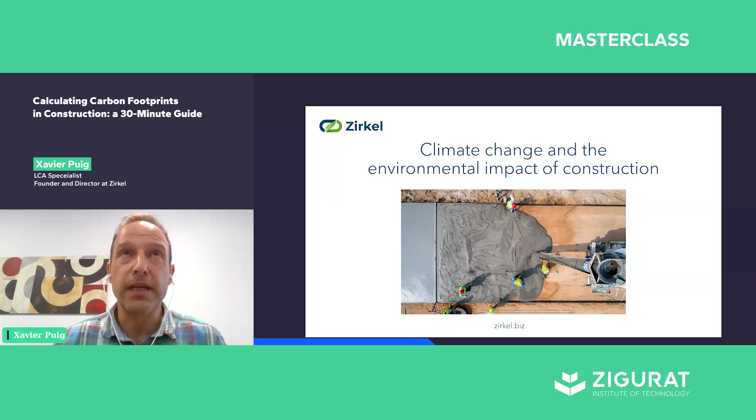So now we are going to talk about the topic of carbon footprinting in the construction sector. We will talk about buildings, and we will talk also about construction products, construction materials. So first of all, just to give a picture of the relevance of the carbon footprint of the construction sector.

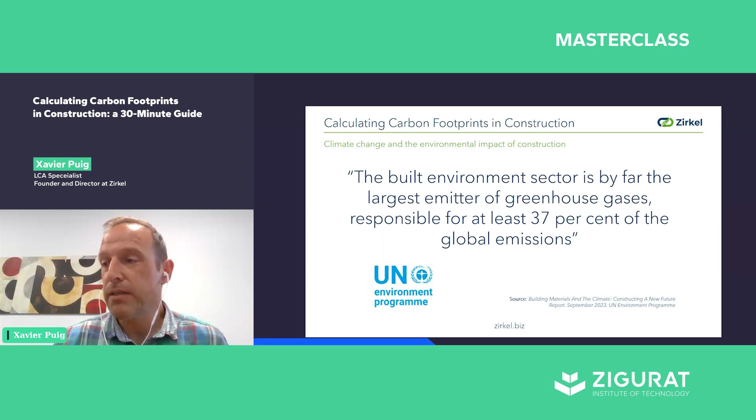According to the United Nations, the built environment is responsible for more or less 40% of global emissions worldwide. Okay, so it's a big number. And we also have to take into consideration that, according to some projections, the global building floor area is expected to double in 2060 in relation to 2020.

So, in a scenario of global warming, taking into consideration the contribution of the built environment to that global warming, and the projected growth of the building sector worldwide in the next decades, it makes total sense for all professionals in the industry to understand what the carbon footprint is,

to understand how to assess and calculate it, and also how to implement measures to reduce this carbon footprint and to build more environmentally friendly buildings. Okay, so this is the general scenario.

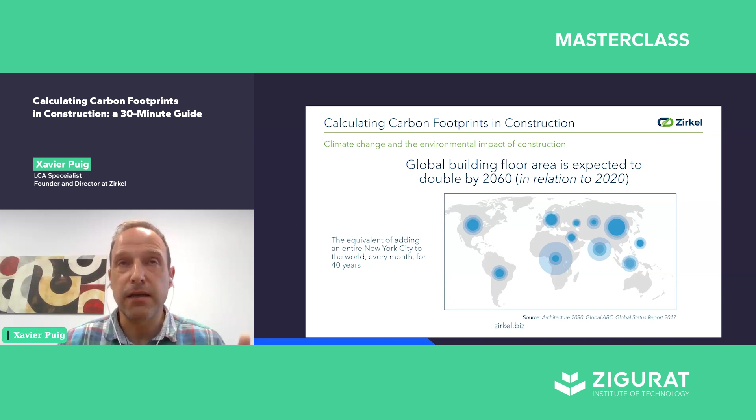And now, if we focus on the carbon footprint of the built environment, of the building, we have to understand that there are two stages in the life cycle of a building and also of a construction product that contribute to global warming, to the emissions of CO2. One concept is the embodied carbon. The embodied carbon is all the emissions related to the manufacturing of the materials of a building. This is the carbon that is embodied in a construction, in a building.

Then this building, during its service life, is consuming energy, and the production of this energy is also emitting CO2. So we have, on one side, the embodied carbon in the materials of the building, and on the other hand, the emissions produced every day during the service life of the building, related to the energy that the building is using. So the grouping of that is the life cycle carbon emissions of a building.

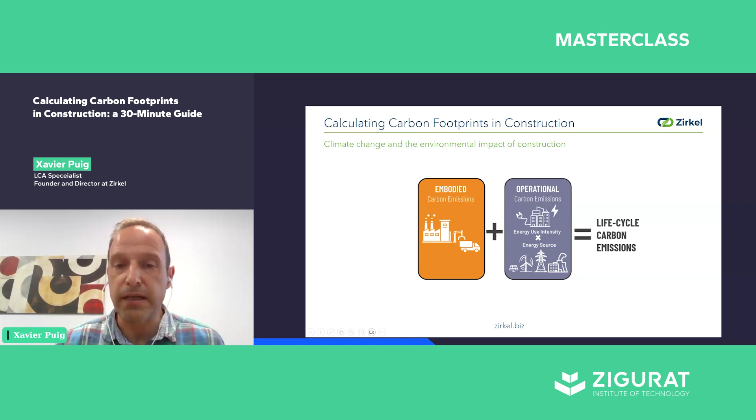So to understand that a little bit more, what we know is that nowadays roughly 75% of the emissions of the life cycle of a building come from the operations of that building, from all the emissions related to the manufacturing of the energy consumed by this building, and roughly 25% of emissions correspond to the embodied carbon in the materials of the building.

So efforts over the last decades have been put on reducing the operational emissions using strategies of efficiency and so on. So the expectation is that in the coming years, the proportion of operational emissions will decrease, because there is more and more electrification of energy, and more and more use of renewable sources of energy to provide energy to the buildings.

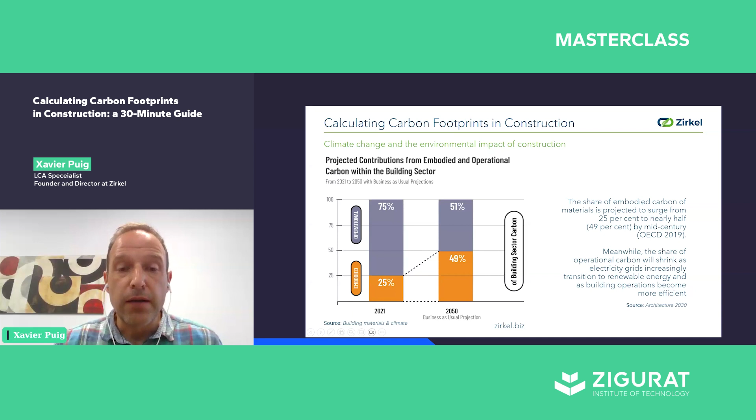Okay, and to sum up, in 2021, 75% of emissions correspond to the operational, and 25% correspond to the embodied carbon. But in 2050, because of the improvement in efficiency and the spread of the renewable energies, the proportion of the embodied carbon will increase.

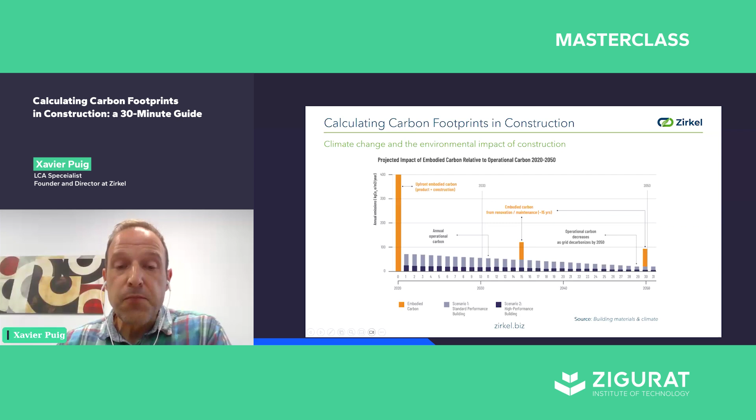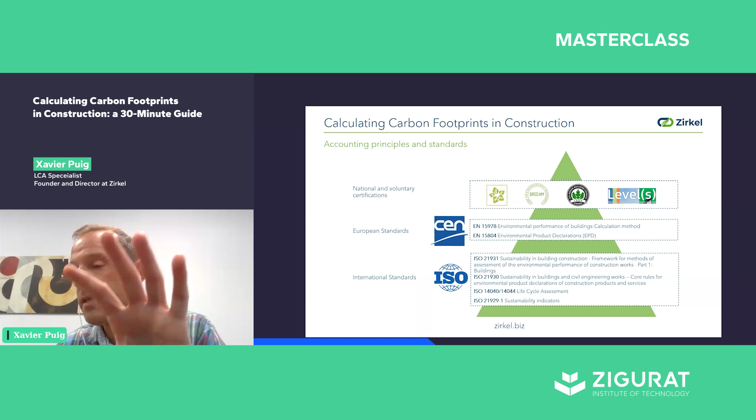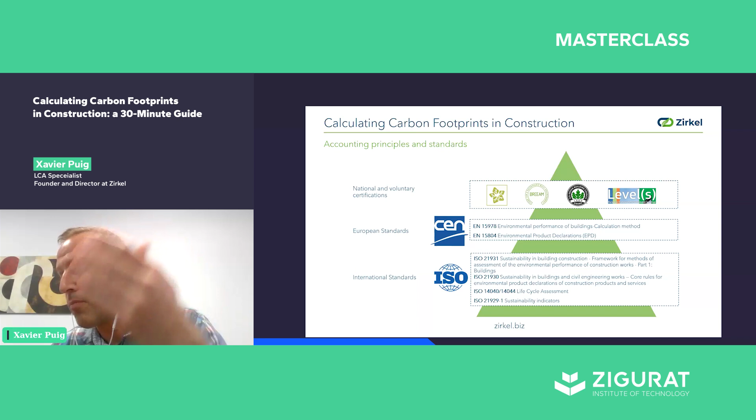So upon these standards, in Europe, CEN has developed standards for the European region based on those international standards. There are two standards that are key. One is 15978 for the environmental performance of buildings, and 15804 for the environmental performance of construction products and for the development of EPDs. And then on the top of this pyramid, we have the national and voluntary certifications like LEED, BREEAM, Verde, Level(s) in Europe, that have specific methodologies, but all of them are in accordance with the European standards and the international standards.

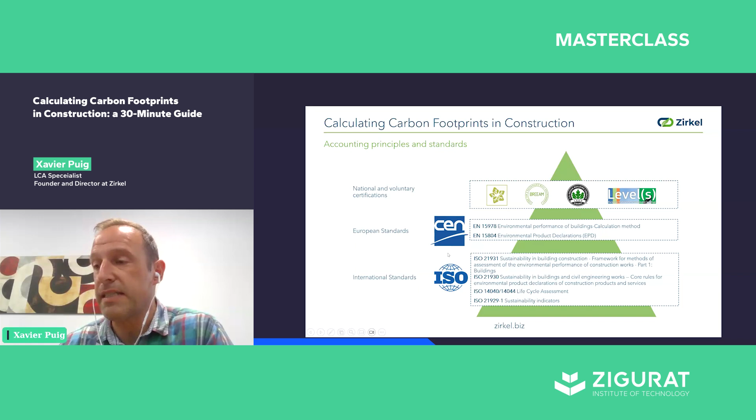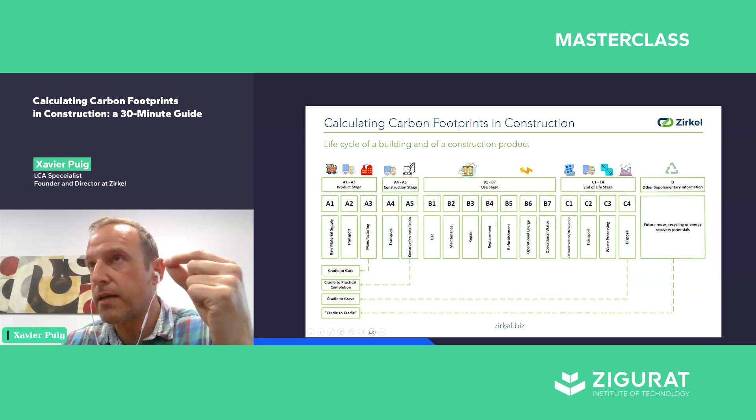So now let's understand what is the life cycle of a building and what is the life cycle of a construction product. So in this slide, we can see the different modules or stages of the life cycle, right? And this is valid for both the building and the construction product. We have the product stage, okay, this accounts the emissions related to all the processes related to the extraction of raw materials. Then the transportation of these raw materials to the manufacturer site and the manufacturing of the raw material. Okay, this is the product stage.

Then the next module is the construction stage, and this accounts for the transportation of the construction product from the manufacturer to the construction site. This is A4, and then A5 accounts for all the emissions related to all the processes involved in the construction and installation of the building. All the consumption of fuel by the machinery and so on. Then comes the B stage that goes from B1 to B7. This is to account the emissions during the service life of the building or the material.

Okay. In this service life, the module B6 is very important, that is the operational energy that we said before, right? The operational energy is the consumption of energy made by the building or by the product during its service life. From the building perspective, B6 is all the energy that the building consumes during its service life, let's say 50 years, okay? From the product perspective, B6 is the energy that the product consumes during its service life.

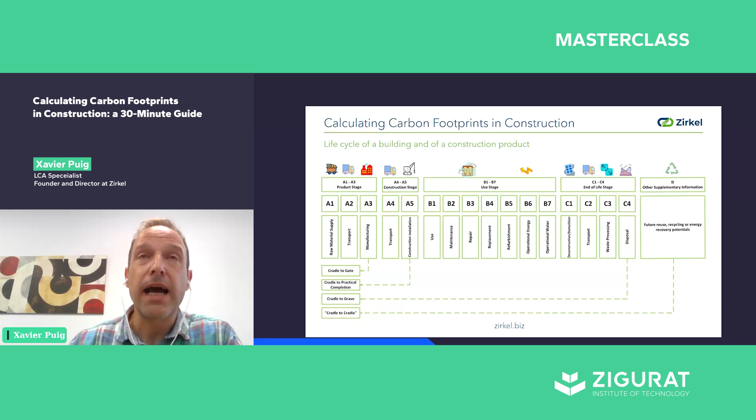So when you recycle some materials, you are avoiding the manufacturing of a virgin or primary material, and this avoidance can be accounted as a benefit for the environment. And this is accounted here in the module D.

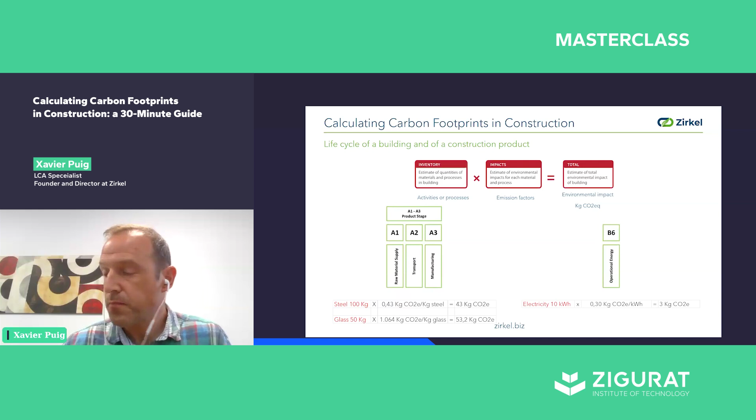Okay, once said that, now we will make a focus on EPDs, because they are becoming more and more important, and they are really, let's say, the passports with the environmental profile, environmental information of any construction product. So we will have now a focus on the EPDs.

What is an EPD? Well, an EPD is a type 3 label, an environmental label that is descriptive. It provides the environmental profile of a product. It doesn't evaluate the performance. The EPD doesn't say if the product is good or not good environmentally, or is better than another one. It simply is a picture of the environmental profile of the product. This is verified by a third-party verifier. This provides the environmental profile for one functional unit or declared unit of a product. One declared unit can be 1 square meter of the product, one cubic meter, or 1 ton of the product.

This is made like this to contribute to the comparability of different EPDs. So if we have 2 EPDs of different manufacturers of concrete, both EPDs will have the environmental profile of the product related, in both cases, to 1 ton of product. So the user of the EPD can understand very well the difference in performance between the 2 products, because this environmental information is related to the same declared unit, in that case 1 ton of product. And the validity of EPDs is 5 years. Okay.

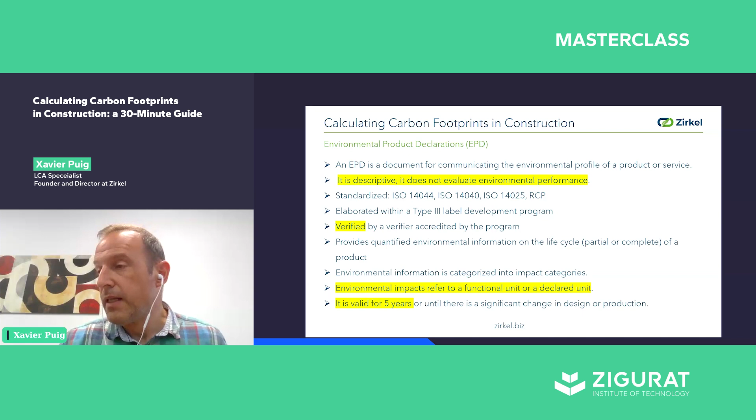In that ecosystem of the EPDs, we have 2 concepts that are important. One concept is the EPD program operator. The program operator is the entity that publishes the EPD and maintains the EPD. All the EPDs are public, and all of them are included in a database that is always open to everybody, and this database is maintained by the program operator.

And one important role of the program operators is that they develop PCRs. PCR is a product category rule that is, let's say, like a cookbook or book of recipes of how the life cycle assessment of that category of products has to be conducted. This is important because all products of the same category are assessed in the same way, following the same category rule. So this contributes to the comparison of the results of different EPDs of different products of the same category.

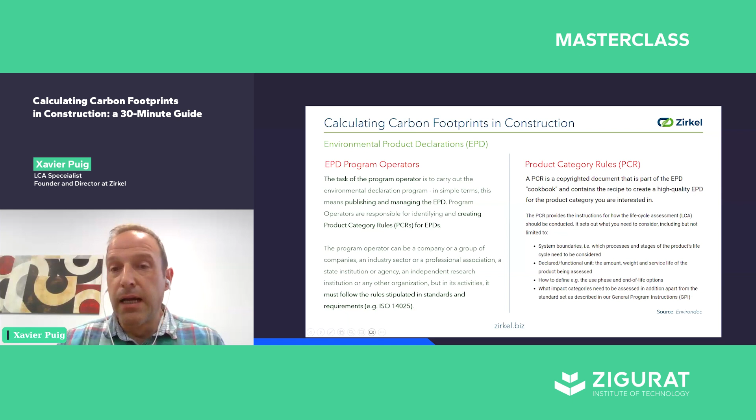Here in Europe, there is one entity that is Eco Platform. This is an umbrella organization that harmonizes how the different program operators develop PCRs and publish and maintain EPDs. So the role of Eco Platform is to gather together all the different program operators in Europe, program operators of EPDs of construction products, and to harmonize the way they develop PCRs and the way they publish information, just to contribute to a better comparability of the information of different EPDs developed by different program operators.

So at the end, that topic of the comparability and the harmonization of the information in EPDs is very important to facilitate and to contribute for the users of the EPDs to be able to understand the different environmental profiles of different products. Okay.

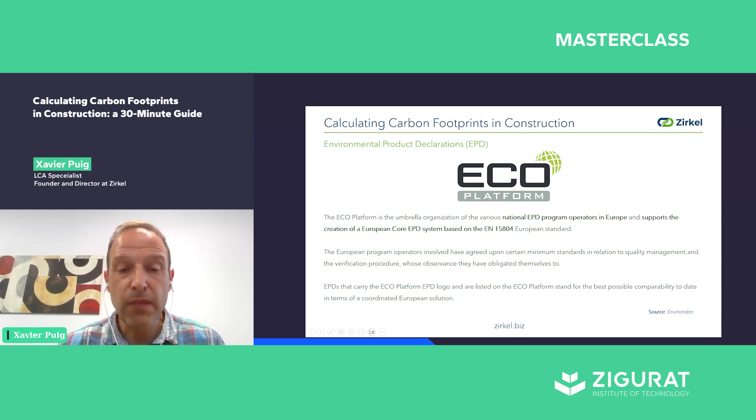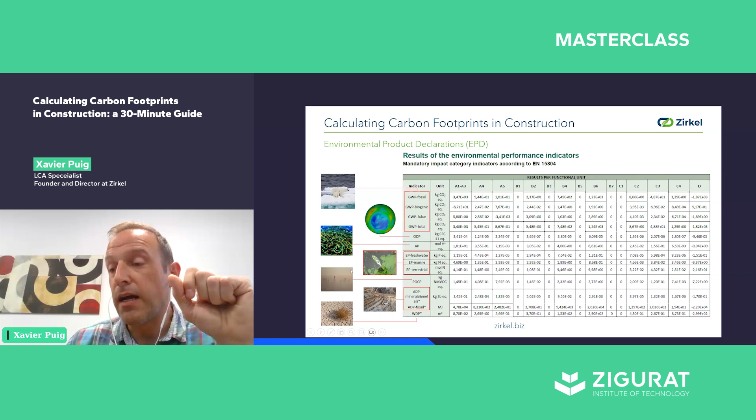And on the vertical, we have 13 environmental categories. We have global warming. This is, let's say, the queen of the environmental categories that we look at when we assess the performance of a construction product. But not the only one. We have also ozone depletion, acidification, eutrophication of the water, terrestrial eutrophication, formation of smog, depletion of resources, and water depletion. These 13 categories are mandatory for all the EPDs of construction products. And of course, the most relevant, as I said, is global warming potential.

And here we have the values for each category on the different stages. This chart gives a lot of information because when you read it, you understand in which stage of the life cycle you have the biggest impact. Okay.

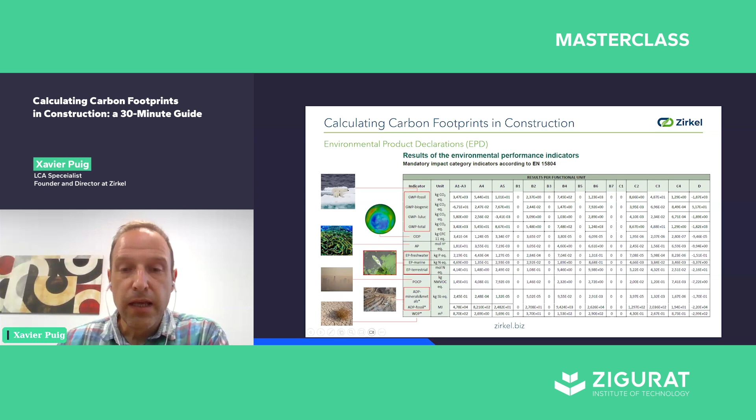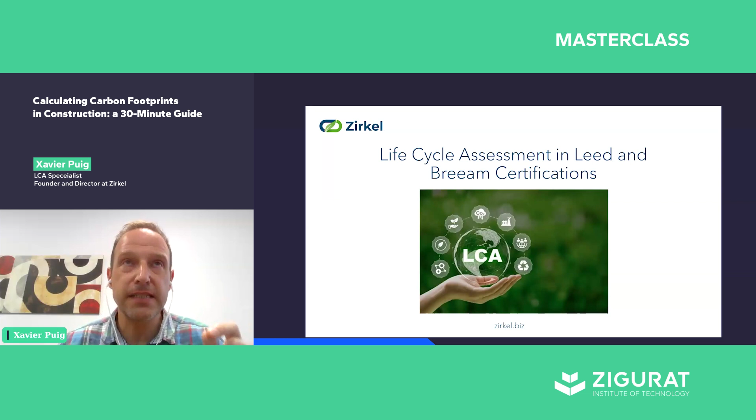So just a quick picture on how the life cycle assessment is considered in BREEAM and LEED certifications. The life cycle assessment of a building is taken into account in LEED and BREEAM certifications. Both certifications give points and credits if the project includes the life cycle of the building. LEED gives 3 points and BREEAM gives up to 9 credits.

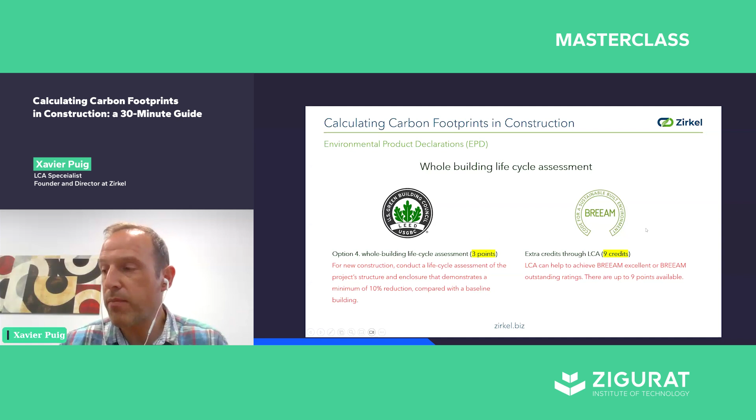Also, LEED and BREEAM give points if in the project there are products with EPDs. In that case, if there are 20 different products with EPDs, for both LEED and BREEAM, they give more points to the project if it includes products with EPDs.

So now, just to go to the end of the presentation, we will see 2 real cases of life cycle of a building and also of EPDs. So starting with the life cycle of a building, here at Zirkel we conducted an LCA comparison between 3 types of buildings. It was one building of 152 square meters, service life of 50 years. And we modeled the carbon footprint of the building built in a steel frame, in wood frame, and in precast concrete.

And we wanted to see what was the carbon footprint of the same building built with different construction systems. So the result of that study gave us that the construction with wood had the lowest carbon footprint, 422 kilograms of CO2 per square meter, against 773 for the steel frame and 1070 for the precast concrete. Okay.

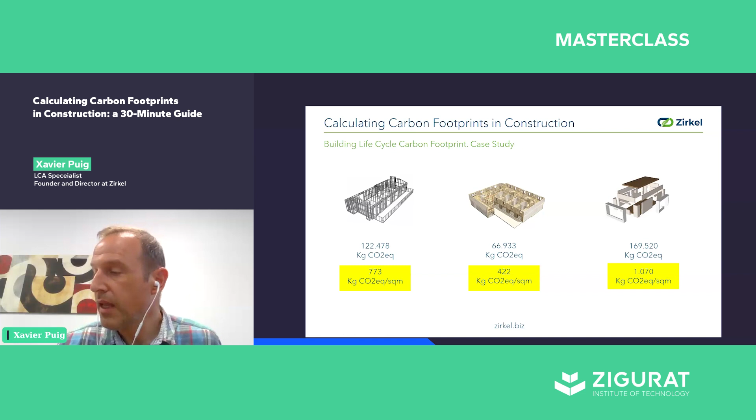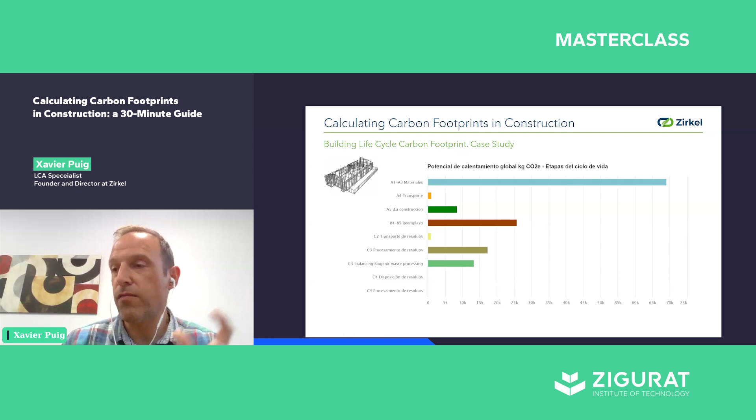Okay, and now we are going to see in detail some EPDs. And I want to provide some key concepts related to the EPDs. One is the product category rule. Okay, we have already talked about that. Well, the product category rule is the methodology that says how the life cycle assessment has to be conducted. And the standard 15804 is the base of the life cycle assessment for construction products.

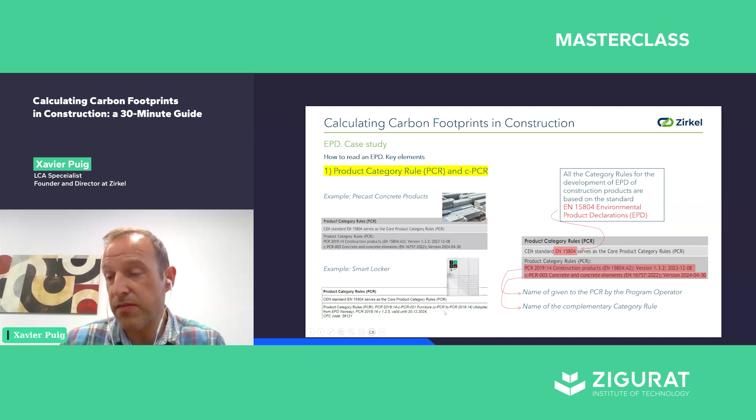We have also complementary product category rules, c-PCR, that are specific category rules that complement the generic one for building materials. Here on the left side, this is an extraction of one EPD of a precast concrete product. The core standard is EN 15804, and then we have complementary category rules for concrete and concrete elements. This is an extraction of one EPD of a smart locker. Also, the core standard is the 15804, and it has specific complementary category rules for furniture.

And then another key concept that we have already mentioned is the functional or declared unit. And this is the measure to which the environmental profile of the product is related. So the environmental profile is related, in the case of the precast concrete, to 1 ton of product. In the case of wooden panels, to 1 cubic meter of product. Okay, and that's the declared unit, the quantity of a construction product for use as a reference in an EPD for an environmental declaration based on one or more information modules.

And then, in the case of glass wool, this is extracted from an EPD of that glass wool. The functional unit is providing a thermal insulation of 1 square meter of product with a thermal resistance during 60 years. So, in the case of the glass wool, the environmental performance is related to that functional unit. Okay.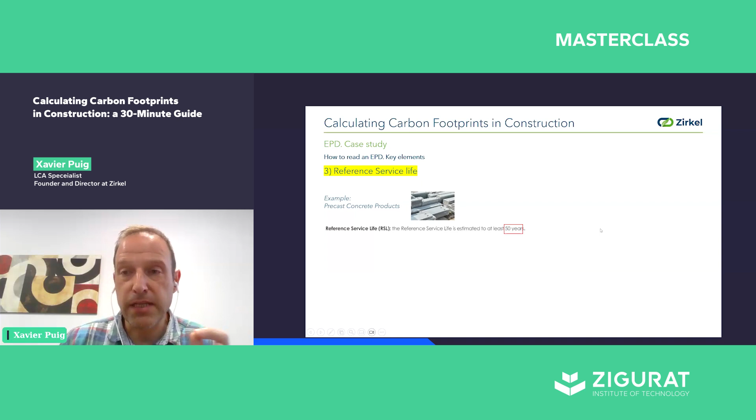A third concept important to understand in an EPD is the reference service life. Normally, the reference service life of construction products is 50 years, but not always. You can see for the concrete, for the wood panels, for the glass wool it is 60 years. And this concept is important. And here we have an example. Just imagine that we have product A and product B, made with the same technology. They accomplish the same function, they have the same declared unit, and they have the same global warming potential. It is 100 kilograms of CO2 for the whole life cycle for product A or for product B.

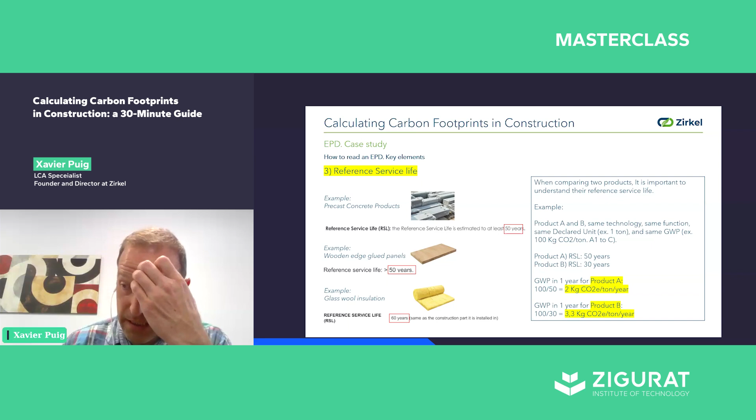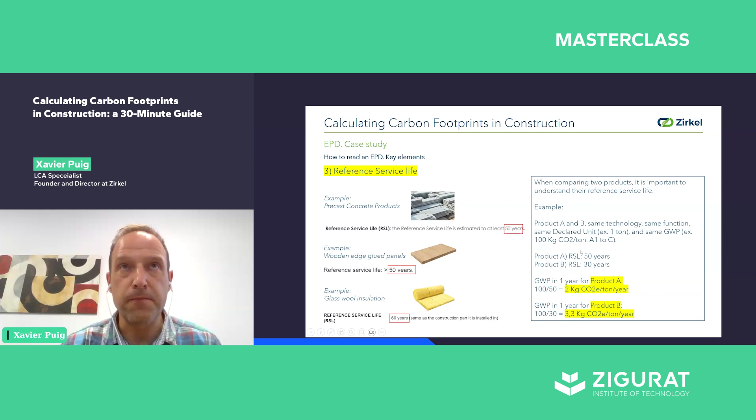And apparently they are the same. They have the same environmental profile. But it happens that product A has a reference service life of 50 years, and product B has a reference service life of 30 years. If we apply the carbon footprint per year, we can see that product A has 2 kilograms of CO2 per ton per year, and product B more than 3 kilograms of CO2 per year. And this is because the reference service life of product B is shorter than product A. So when you compare EPDs, you have to pay attention to the reference service life of the product.